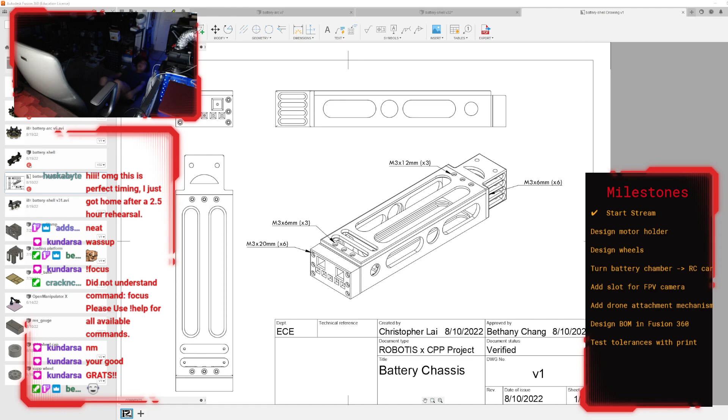Alright, here we go. 1, 2, 3, and one more just to get back up.

Redeem do 6 squats. Okay, alright, squats are the ones I'm not good at. I have fallen over multiple times because of this.

I should get some light in here. Hold on. Floor lights. Side lights. My $40 Amazon hotel lights are worth it.

Alright, there's like no space here, so I'm just gonna... Alright, here we go, 6 squats. 1, 2, 3. Oh, I'm starting to feel it already. It's 3 squats, 4, 5, 6. Alright, that wasn't too bad.

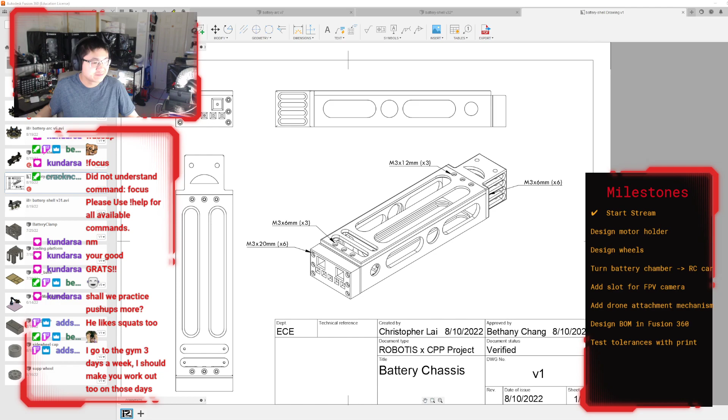I do not like squats, they make my legs feel terrible in a day. Oh, Hype Train is close. Nice. No, no, no, no, huskabyte, no.

I go to the gym 3 days a week. I should make you work out too on those days. That's what all my friends say, they want me to start working out. I politely decline. Except for Twitch.

Alright, so where were we? Yesterday. What were we doing?

I need to get a new PC, this computer sucks. Alright, like an actual PC this time.

Right, I was doing this stuff, which I haven't saved it yet. This is beginning to look a lot more like the MIT design. That's out, you haven't seen it yet. Things that rotate, it's fine.

Yeah, I pulled like 2 all-nighters doing this for Friday. Anyways.

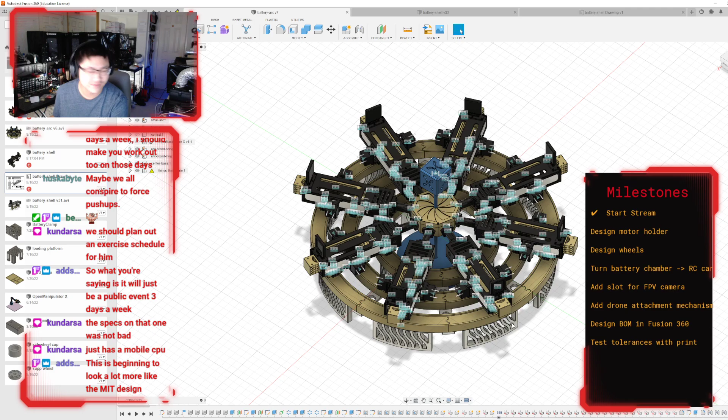That, this contains over 1,000 screws. We verified it in stream. And then what I'm doing here is I'm making it into an RC car, just because.

Wheel design and all. I still don't like this design. Save it for yesterday, I don't like it.

1,376 - it's about 1 to 1.5 kilograms of plastic. The number of screws traumatized me enough to remember the exact number.

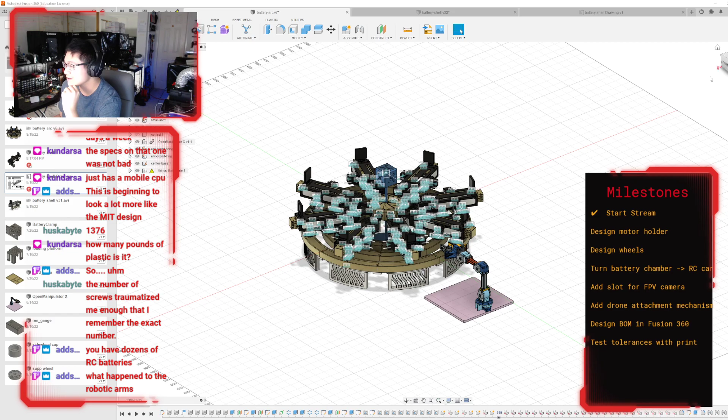You have dozens of RC batteries. No, I have 8. You want to see where the robotic arm is? Boom, there's the robotic arm. It's not even on a battery.

Let me just change that real quick. Boom, there's the robotic arm. Look at it grabbing the battery out. Look at that, look at that.

So the entire battery chamber rotates, right? Oh, it's on the other side. I didn't feel like putting it in. The robotic arm just needs to do a 180-degree turn from the drone.

You know what, I'll put it in. Where is this? Where is your thing? Oh, here it is. This is gonna lag immensely. Give it a second.

So the idea is that from the ground station to this thing, there's a 180-degree turn with a loading platform. And this is so that... oh, goodness. Okay.

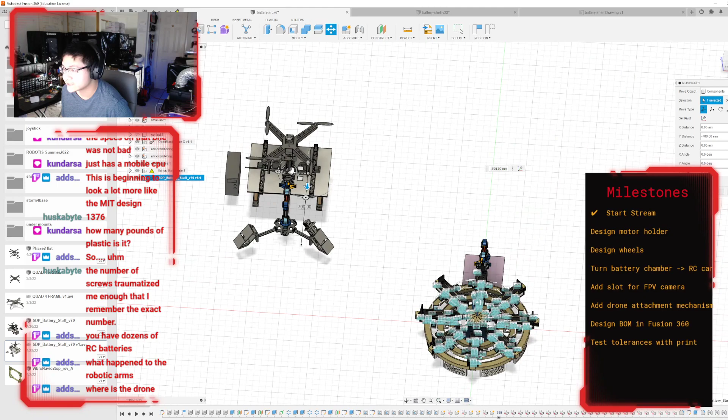So the idea is that the drone and the ground station are on one side, this thing is on the other side, and the robotic arm just does a 180. And it kind of works.

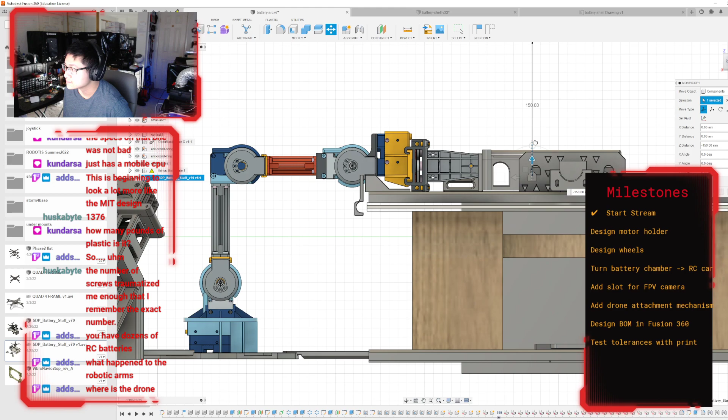So from ground station to battery chamber, 180-degree turn, so that you don't have to precision slot it in. You can just program in one command, go from point A to point B.

And then we have a planetary gearbox in the middle with the Dynamixel motors that they provided for us during the summer. At least that's the gist of it. I should explain that to you later, sandwich.

Alright, so design time. Make this like 30, 25.

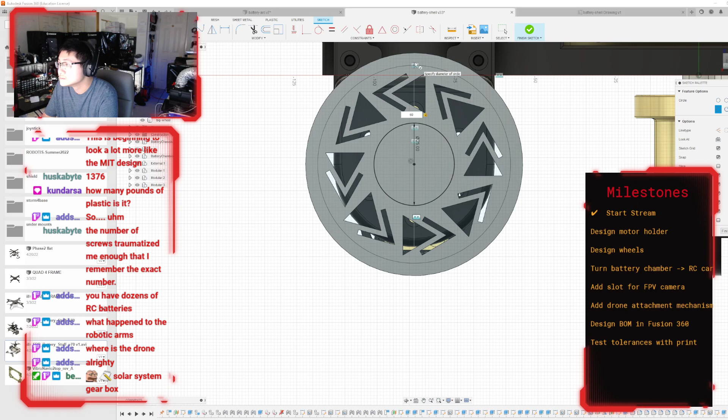The solar system gearbox, yeah. Basically, I have this really insanely heavy stepper motor that's going to be in the center of this whole thing.

And then there's going to be these two expensive motors. But this thing was like $30. These two motors were like $500. I still can't wrap my head around that. This is to give it a lot of torque. I just smacked my head with it. And these are going to help it turn.

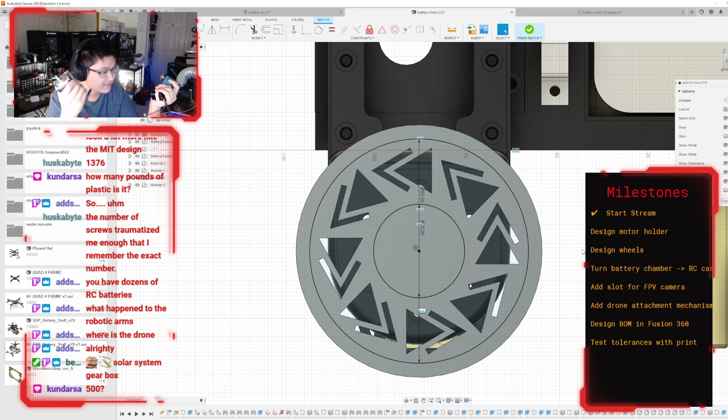500, yeah, Dynamixel motors. I haven't even considered the electronic assembly process for this. So...

More servos. Unfortunately, Robotis does not have servos. Our sponsor wants us to use the motors, and I'm going to use the motors anyways. They're just for giving us more force to work with, really.

No, because the Dynamixel motors have an insane encoding system that we can use.

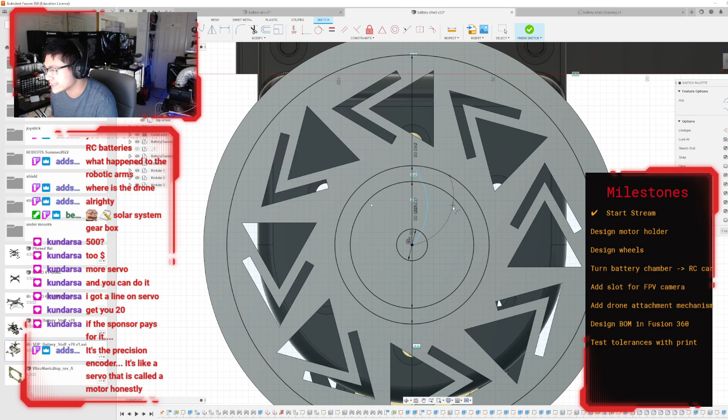How was I gonna do this? Got a line on servo, get you 20. It's supposed to pay for... Yeah, this project, I'm not paying for out of my own pocket. I mean, technically I am for the moment, but we have a sponsor that gives us stuff, so I'd very much like to use the sponsor stuff. If it were me, I would just use regular servos because I'm cheap, and I don't have the money for that.

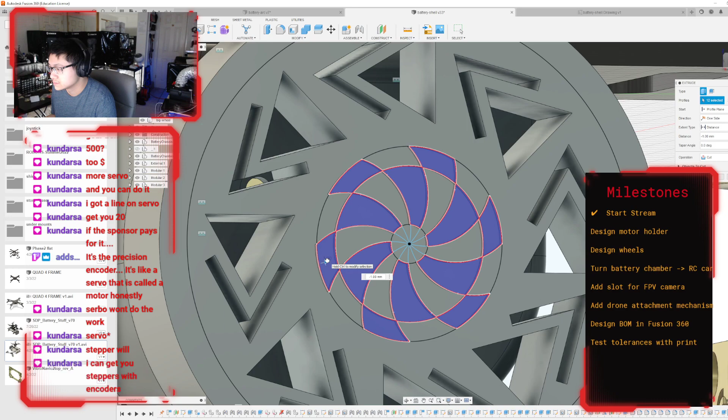That looks pretty cool. I'm going for the flashy factor with these wheels.

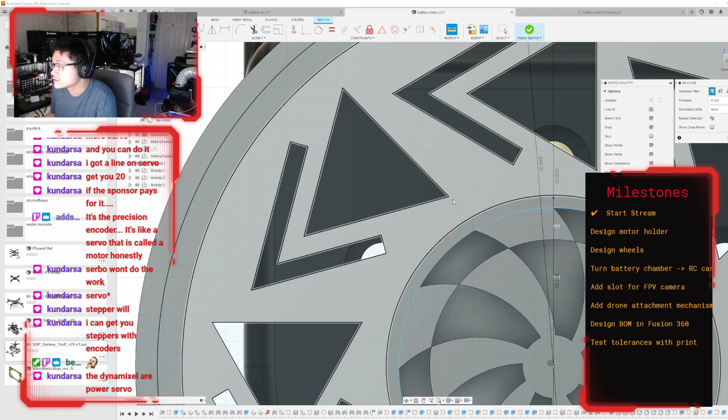Close enough. I'm gonna mark that off as aerodynamics, if they ask me why the complicated design.

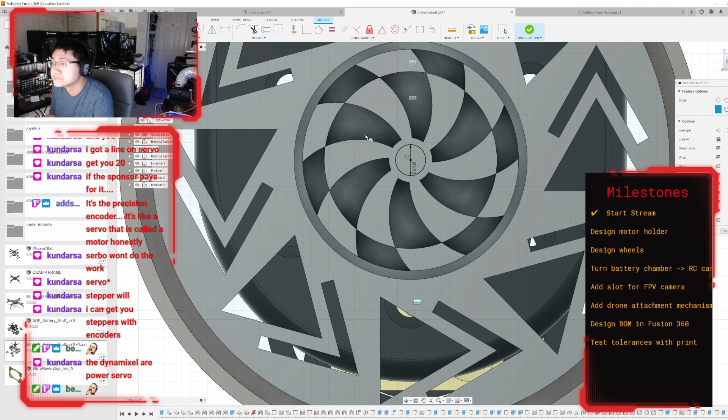Okay, do I want anything on the rim? Why is there this little piece here? I think I might make a TPU rubber wheel around this. The Dynamixel are power servos - the ones that they gave me are actually actuators.

What was he doing again? Right.

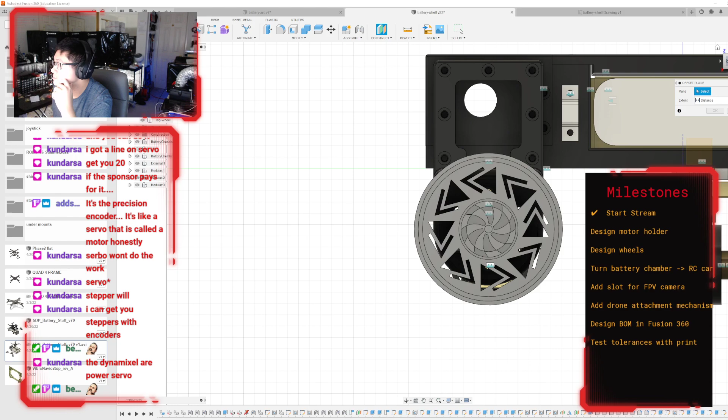No, I need a tangent plane. No, I need to make the TPU thing.

So this is going to extend outwards into the floor, but I hope it's going to provide some cushioning.

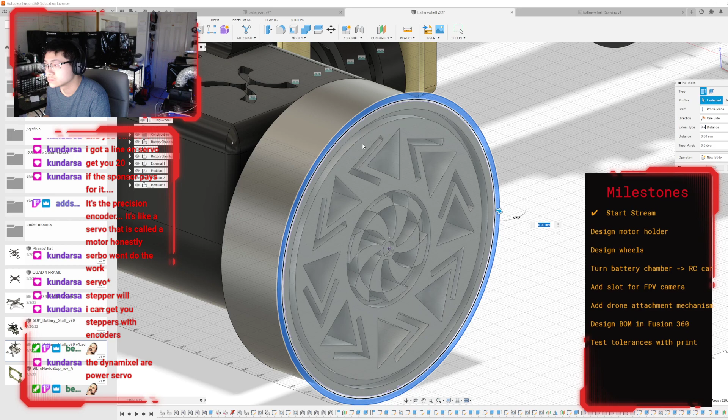Alright, so that's the TPU cover. I have no idea if the tolerances are correct or not. We'll figure that out later. Hopefully the tolerances are tight enough to hold together. And then I can go ahead and draw some fancy shapes on the side of this thing.

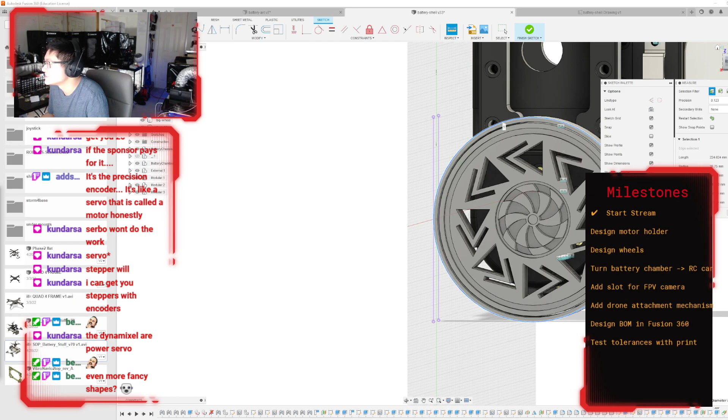So the circumference of this thing is 224.624. Even more fancy shape, indeed, yes. Can't get enough of the fancy shapes. So 224.624. Okay, I have this much room to work with.

Let's do some tangent lines. I love my tangent lines. Wait, why isn't that line...

Ooh, I have to get the Hyperloop rolling again. Maybe we'll do some Hyperloop next week.

That's a fat tangent line. Okay, that'll work.

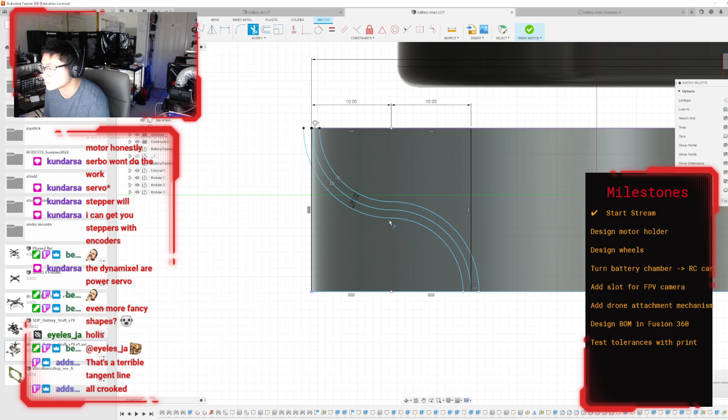Okay, let's go all the way over there. Alright, rectangular pattern.

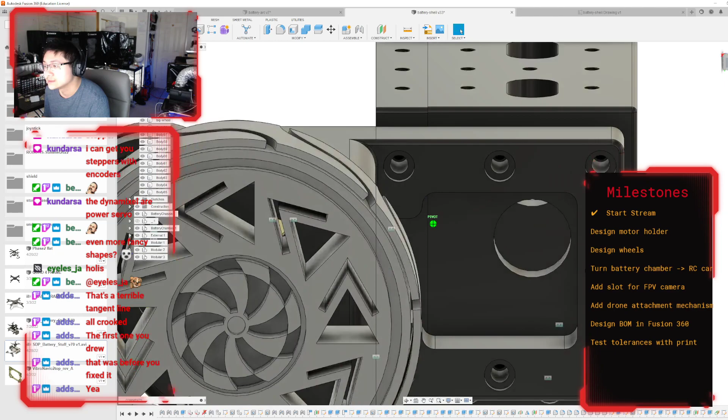That looks fine, right? Slightly questionable, actually. Oh, also it splits the... Ooh, I forgot to do something. I forgot to do an offset for this.

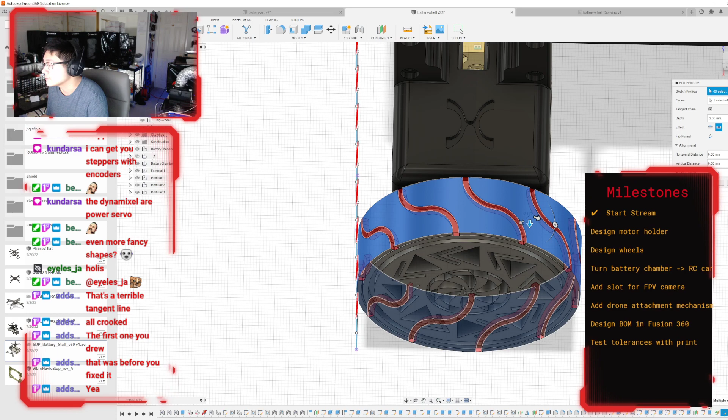So that doesn't emboss all the way. Or, no, I can just do this. I can just do this. Yeah.

Okay, that works. The first thing you drew, that was before you fixed it. Oh, okay, yeah. That's pretty good now. Alright, good enough. Okay, so...

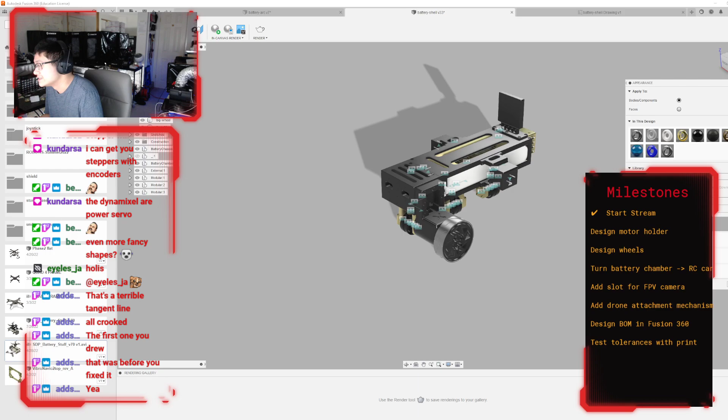Render, I'm gonna color this thing first. I'm gonna color it. Orange - there are no orange plastics. Great. Red. Yeah! Red rims.

Okay, so now to figure out how far this is from the actual motor itself, because none of what I do here actually has dimensions. Like dimensions? What are those?

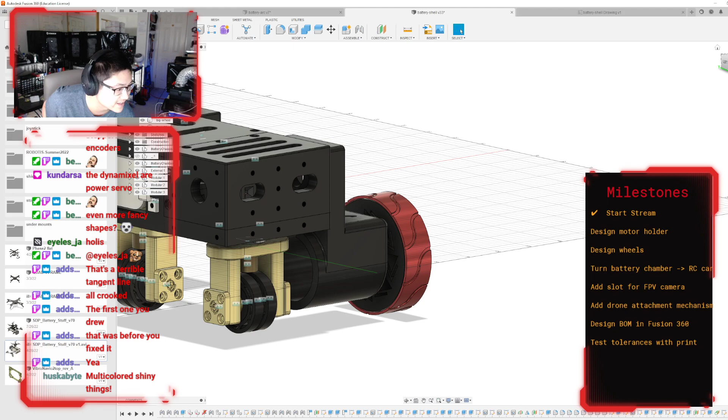Multicolored shiny things. Multicolored shiny things are very, very appealing to the eye.

Alright, how far is this actually going to be from the, where's my motor? I guess I'll need a CAD motor. Fine, I'll CAD motor. The one on the side here.

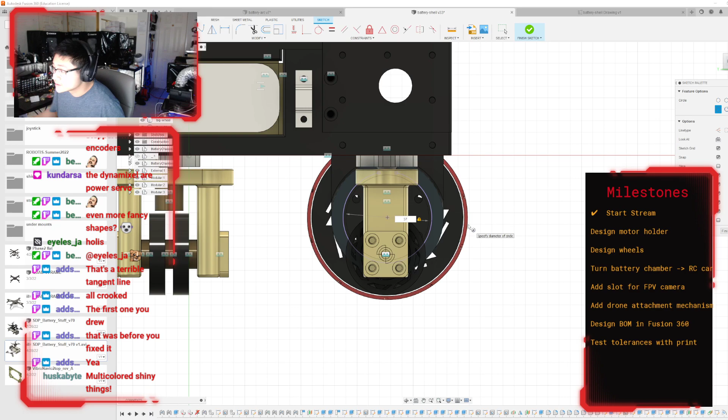So this motor is approximately 37 millimeters. Let me just hide this first. Is approximately 55 millimeters thick, maybe 56. And then on the other side, it has a little shaft.

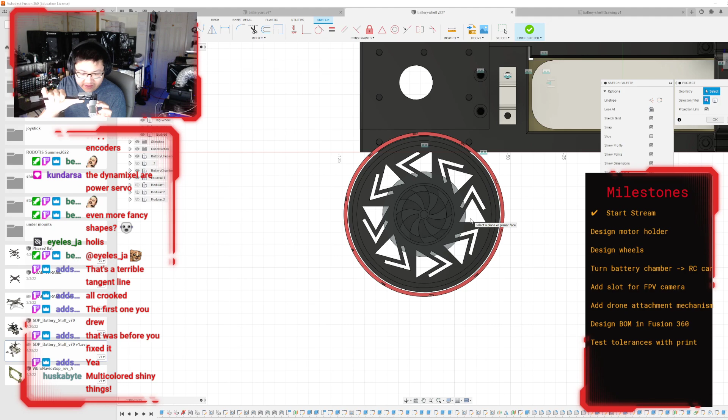Kundarsa redeemed saved my work. Oh yeah, thank you, Kundarsa. 6 millimeters. 6 millimeter shaft on the end, and then extruded to 20 millimeters.

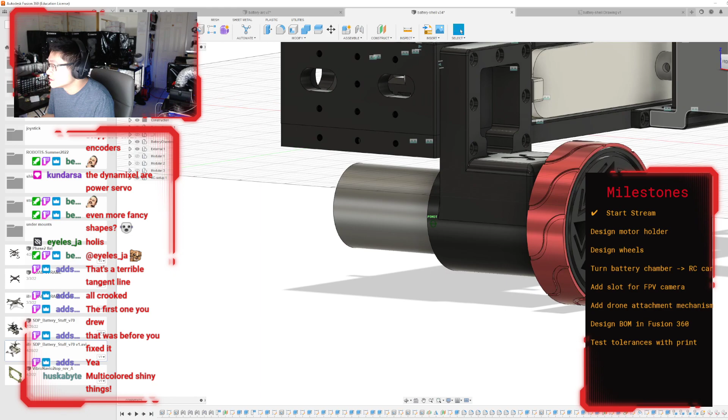So first, I'm gonna go ahead and joint this portion of it into the inside of the motor holder. Motion, I'm gonna give it a sliding motion.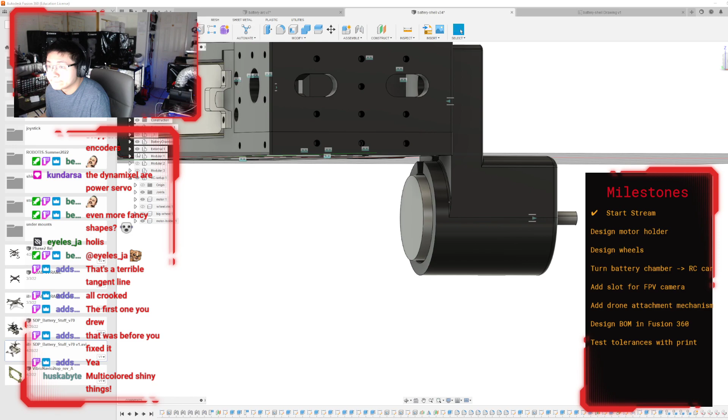Yep, okay, and then that fits, almost - actually, will that hit anything? Barely, okay. Might just screw this a little bit more then. Will that hit anything? Barely. Okay, some very tight tolerances here.

Okay, and then we get to the wheel. I'm gonna joint this thing to this thing. I'll give it a rigid joint. That was a fun shake.

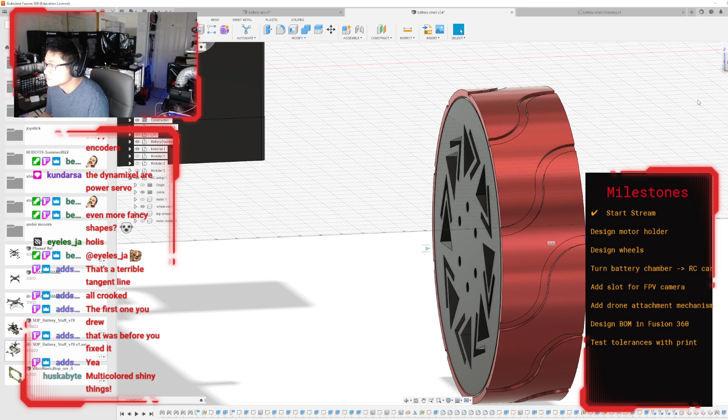Okay, and then I'm going to joint the back piece. Oh, that's a pretty long piece. Right, I realized that this thing does not have anything to hold up with because there's a metal coupler in the middle.

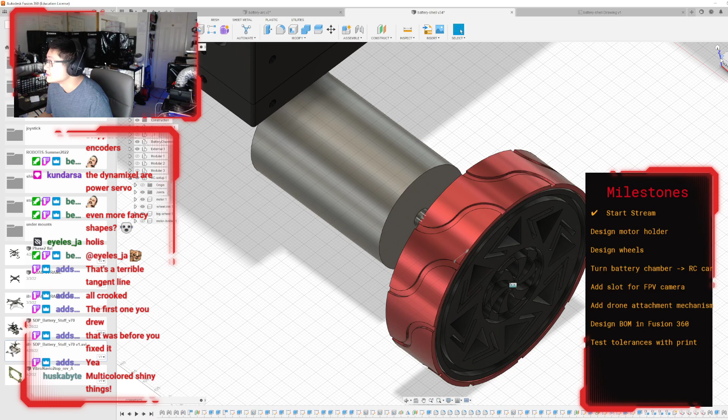Okay, I would go ahead and joint the center of this thing to the motor. They'll give me an approximate size, I think. Okay, now for the grand reveal. Oh hold on, almost forgot to joint.

Oh, stop rotating. Yeah, rigid.

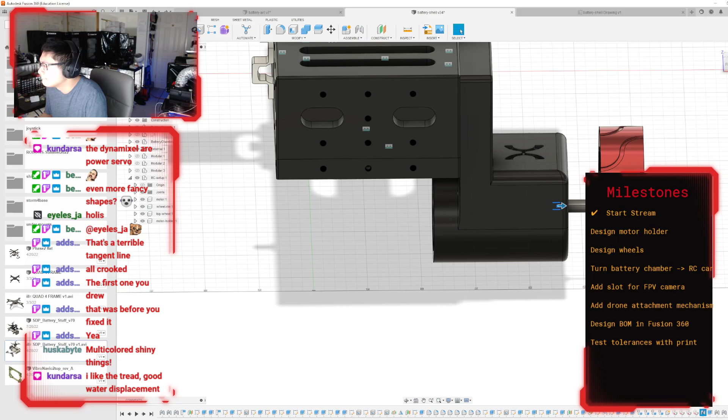Okay, this one was a bad choice. Oh come on, let me edit. There we go.

Good water displacement. Thank you, kundarsa. See, someone appreciates the tangent lines.

Alright, wheel is done, so I'm just gonna copy paste this. Okay, and then joint this piece with this piece.

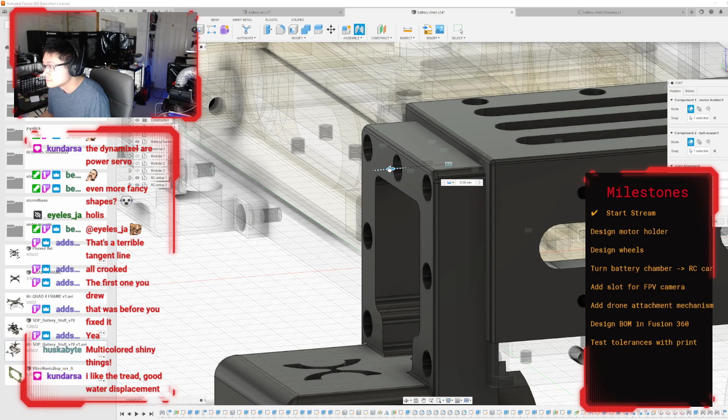Alright, and with that, we've just turned this battery into an RC car. Yeah! Yeah, look at it go.

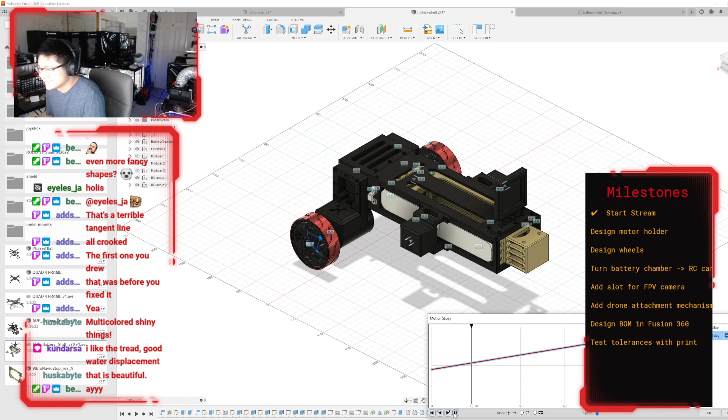Let's do a motion study on this thing, I want to see what it looks like. Look at it go. That's fun.

And I can do the same thing for this one, I think too. Now both of them are gonna turn. Oh, we can do it front and back too. Let's see it. Yeah, look at that. Wheels.

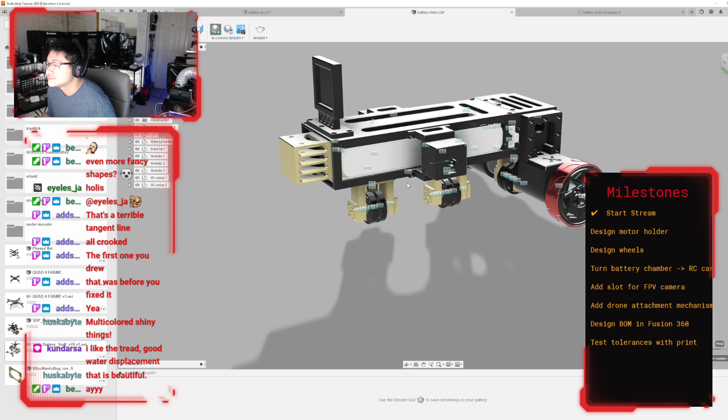Alright, this is definitely not gonna print well though. Alright, we have completed. Let's render the thing - this is what it looks like when it's rendered. Nice, shiny RC car built out of a 4S LiPo battery case. Look at that.

Alright, what's next on the list? Design motor holder, design wheels. That's so much shinier in UI, I know right? Rendering always makes things look cool.

So we did design motor holder, we did design wheels. You guys can't see the rendered design because the thing's in the way, but here we go. My stream's also gonna lag because it doesn't like rendering these things. So, turn battery chamber into RC car - we finished that, just check that off on the list.

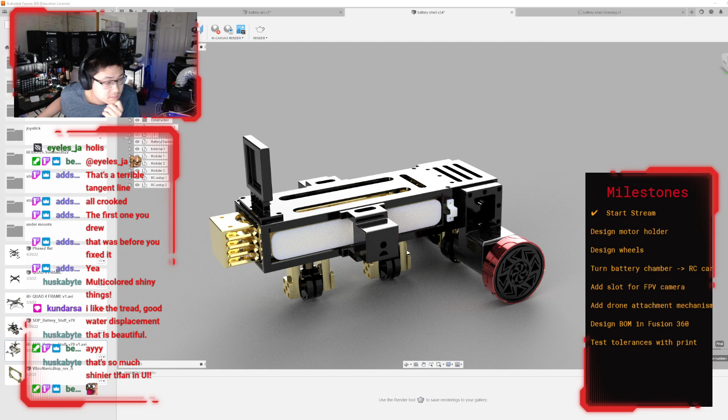Alright, we've done 4. Okay, next is slot for the FPV camera. I'm gonna take a picture and put it in my Discord.

Okay, next is adding the slot for the FPV camera. So a while ago - no, I don't want to do a generative study. A while ago I bought this little tiny FPV camera that I have no idea how to use. It looks like this - it has an antenna, a small camera on it, and I think like a back for addressing things, maybe, I don't know. I just thought it would be cool.

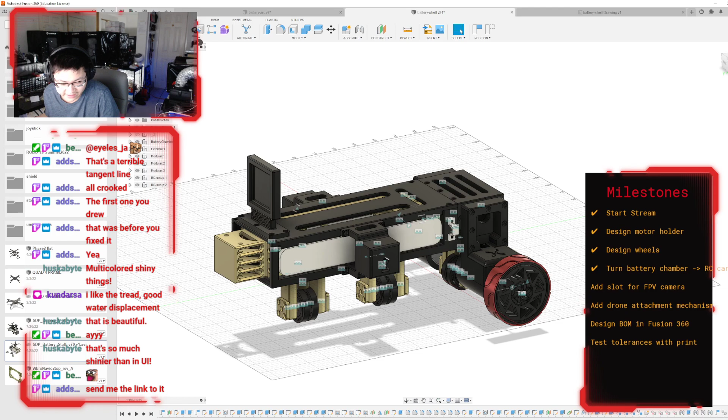Little thing, and I kind of want to use it. Apparently it's very powerful, it's kind of like the same as the iPhone camera. So, mission number 2 is figuring out how to strap this thing onto the battery and then read from it. Because theoretically, if you want to make this like an actual RC car, it would have to go somewhere on the front, and the wire goes into the PCB, and they were able to see stuff on it. Send me a link to it? Yeah, oh, that's how it's gonna know how to use this.

It's a small FPV camera that transmits signals through a radio frequency, a radio channel.

Where are you? Oh, here you go. Oh, by the way, Ed Sandwich, the fans work great. Belty had this issue where if you turned him on - that Belty over there - it would make this really high-pitched whirring noise from the PSU fan.

That was really, really annoying. So I asked Ed Sandwich to send me a recommendation for another PSU fan, and it turned out that all the good ones are sold out. So he just gave me one by default from Amazon. It worked, so Belty has been healed.

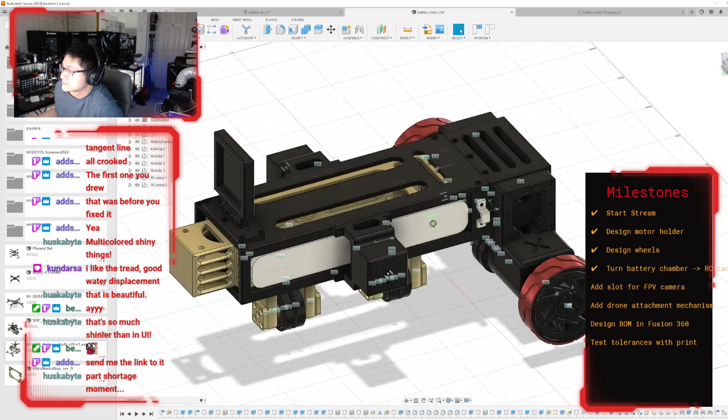Part shortage moment. I mean, you'd think it would be like a chip shortage, but also apparently it's a fan shortage as well. You know, these things can rotate as well, I think. Yeah, they can.

Okay, so I'm going to work on a mount for this. I'm going to put it somewhere up here, maybe. Now this shouldn't be too difficult. Where did I put it? Here.

It's a shipping shortage, really. Glue shortage, shipping shortage really, not even a manufacturing shortage - a supply and demand issue. Yeah, I heard that China has been having supply chokes for the longest time because A, COVID, B, China. Loklokfafa started cornering the market - I did buy a bunch of parts recently for PCB design and also the soldering kits and all from China. Now the rest of us are struggling.

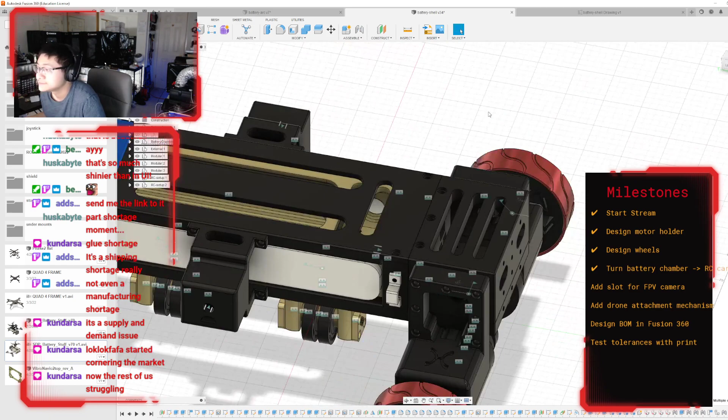Alright, so how am I gonna design a case for this? Well, the most important part is the camera itself, and also the back part where you can see which address it is currently on. I think this is 5 volts. Not sure.

Okay, let's see. The base of it should be relatively easy. By the way, this is the most chock-full PCB board I've ever witnessed in my life. Every single square inch of this PCB is filled with components.

This FPV is a VTX with an omnidirectional antenna, all in one piece. You need a VTX receiver, likely with a patch antenna. That was what I was thinking as well. I need one of those devices where it has that antenna attached to a visual monitor so you can see what's going on.

I looked into this for approximately 3 minutes, but I want to find a way to put this onto a Raspberry Pi or something like that. I think that'd be cool. It's a tiny camera.

So the base of it is going to be, let's see. Okay, the actual object is about 20 millimeters in length. I'm going to give it a generous 20.5. Here, project this.

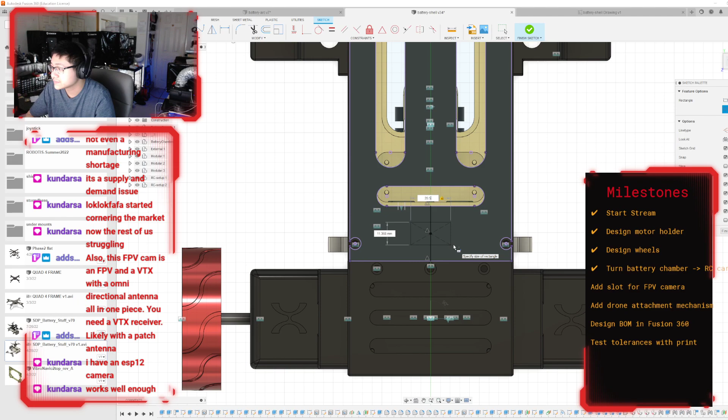Okay, so it'd be centered there, and the base is about 20.5. It's very small, actually, and the width is approximately over 10 millimeters. 10 millimeters. It's a very small camera.

I have an ESP, an ESP12 camera, it works well enough. Oh yeah, I wonder if I can put an ESP32 in this thing. I probably can. Good idea, Kundarsa, good idea.

Alright, then I'm going to make a border around it. So a 5mm border would be 25.5, right? Okay, and then by 30? No, by 20. I'm going to divide that by 2. I'm going to give it 2.5 on each side.

It's a very small design. Maybe 25.5. 2.5, yeah. Okay, and then give it a base of around 2.5.

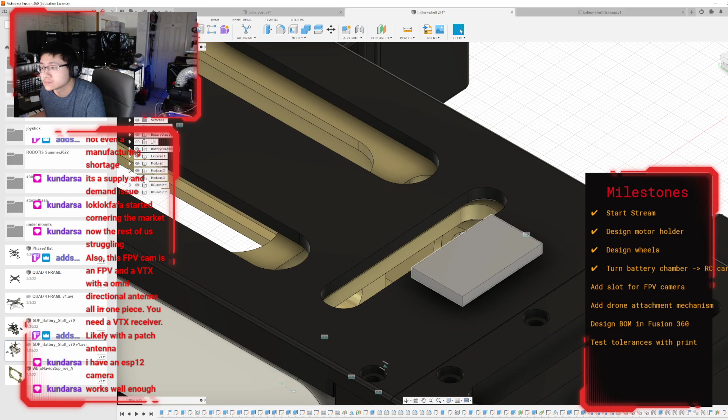Oh, there are 149 sketches. Lovely.

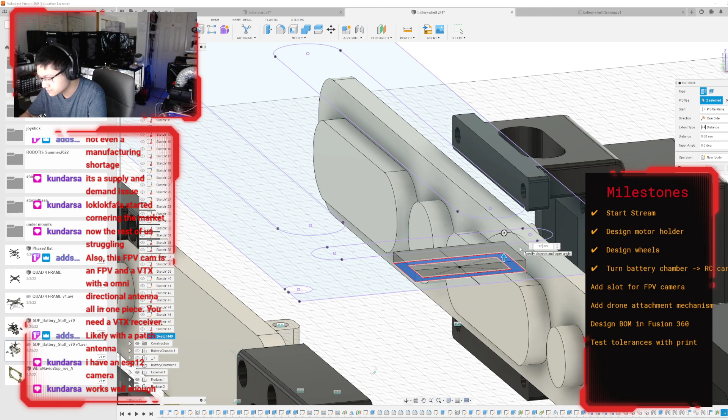Then the outer shell, the height of this thing is around... I'm going to go 15. So 15 plus 2.5 is 17.5. Okay.

All right, now we make some cuts in the middle for the cameras and stuff. So if this entire thing can fit inside this little box here, the sides don't need to be touched. The center does need to be touched.

Should go almost all the way down. So let's see what I need, what parts I need to cut out from the back. The first thing is the center camera. The central camera is about 9mm.

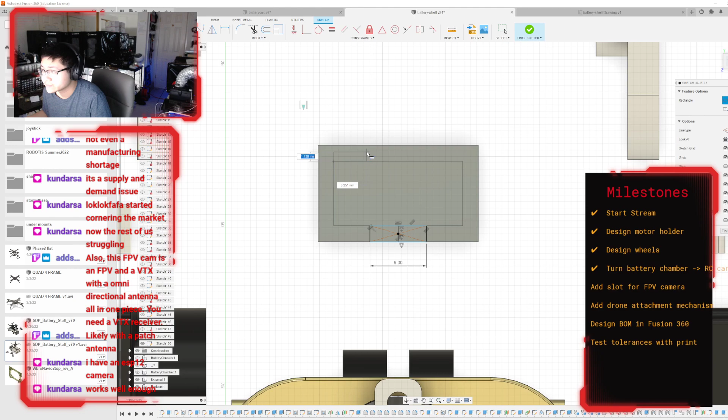Okay, so that'll be for the camera, and then from the back there's an LED looking thing on the back here. This thing is about 7.5mm. And then on the right side there's a wire sticking out of the top, so that is going to be five millimeters.

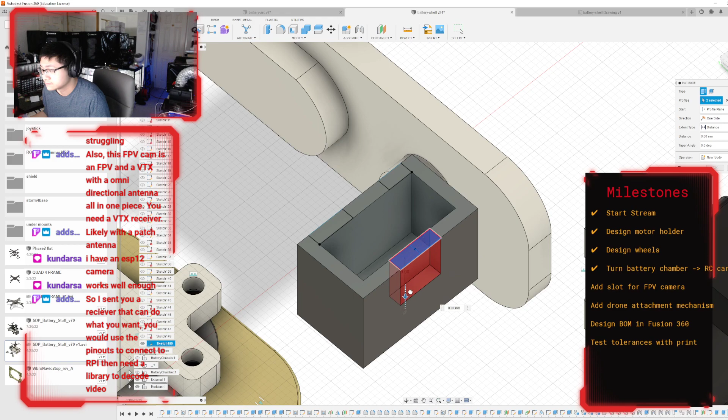Okay, from this to the bottom it's 11.5. Negative 11.5. Oh, same for the other one, I believe. That one's 10. Negative 10. And then this one is negative 7.5. Why are these all three different?

Okay, so I should be able to just slot the FPV camera inside this. And then maybe I can have something, another part, another small part screw onto it.

So I sent you a receiver that can do what you want. You can use the pinouts to connect to the RPi and then a library to decode the video. The encoding for your video transmission is NTSC. Oh, that's useful, thank you.

Let's see this. SkyDroid 5.8G dual receiver. Wow, cool. Awesome, thank you. But I'll still research more for one where you can lock in the channel, because it switches to the strongest signal. Ah, yes, that exists. Okay.

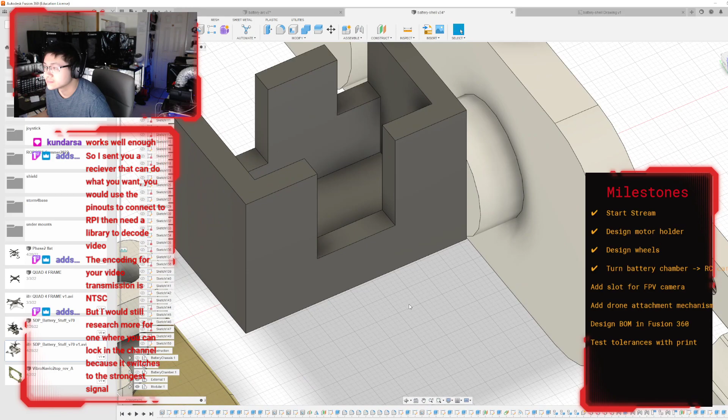Alright, so it needs a top piece to act as a cap for it. I'm going to go ahead and put some fillets on this entire thing, just to make it look pretty.

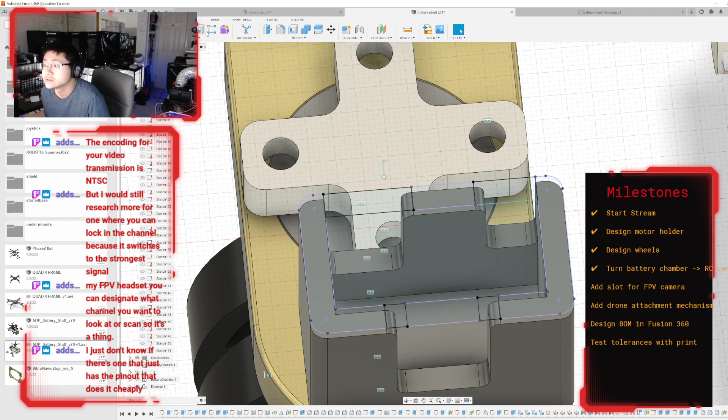Oh, I have to make sure I don't block the back part of it, I think. So that would be this part. Actually, it should be fine. It should be fine.

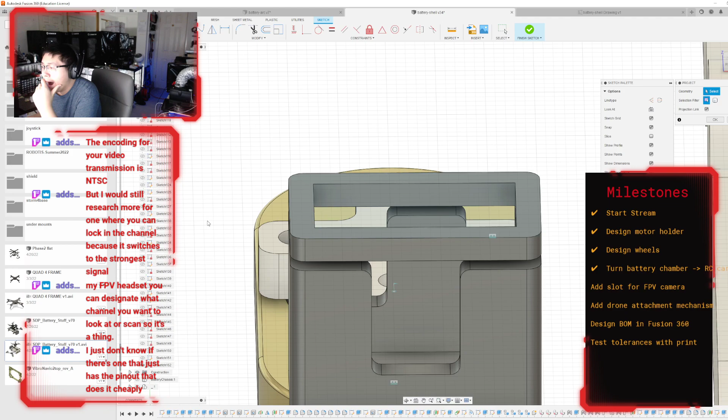Okay, and now I make some holes. This model is lagging my computer so hard right now. I just don't know if there's one that just has the pinout that does it cheaply. Drink some water, I don't know.

Okay, I think these holes are good. I mean, it auto-created them for me, so who am I to disagree? I do need one more here, though.

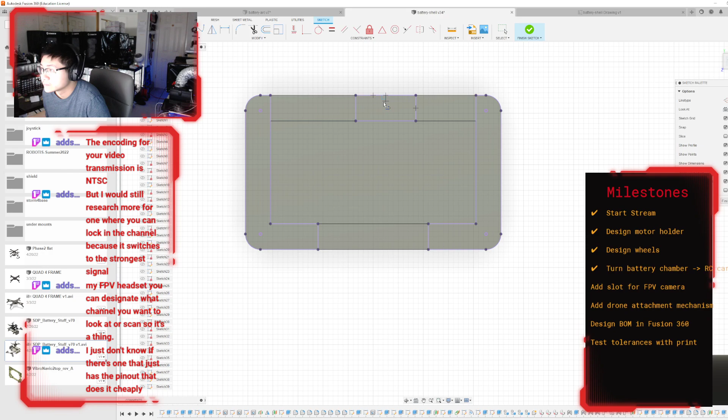Okay, I think these holes can be, they don't have to be M3s, because M2.5s are so large already. I think they have to be M2s. Yeah, they have to be M2s. Scrolling back down to the sketch.

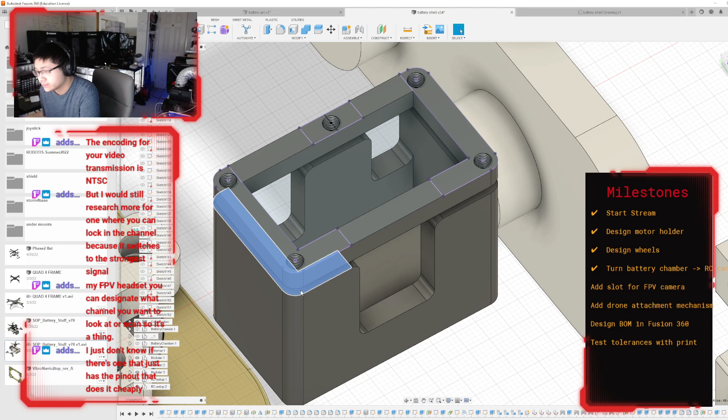So it'll be M2 by 5. M2 by 5 it is. Okay, that part will go on that part. The back will be open. Alright, that's basically it, very easy camera module. Now I just have to apply some screws on the bottom to attach this piece to the battery chamber, and then we'll all be good.

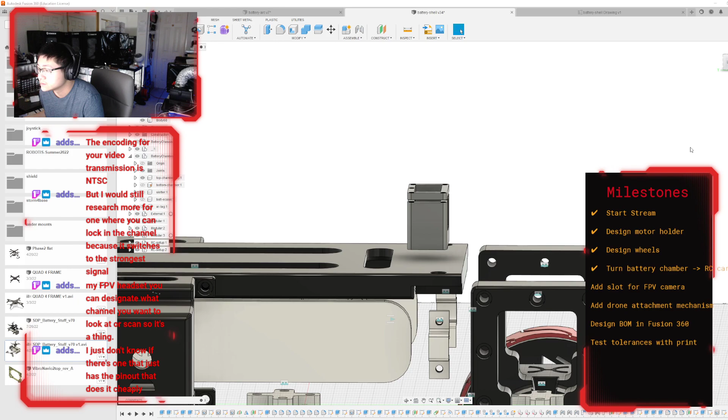So this will most likely be screwed onto the battery chamber from the bottom. So under the battery chamber, bottom, I'm gonna hide everything else. So on the bottom piece here, hey huskabyte, we're about to get some more screws. There's 5 more screws times 8, which is 40 more screws, plus the bottom piece, so let's see how many screws I want here. Slowly getting closer to the goal, 2,000 screws.

Just an FYI, the VTX modules get hot as heck. It might melt PLA if used for more than 15 minutes. Noted. Noted.

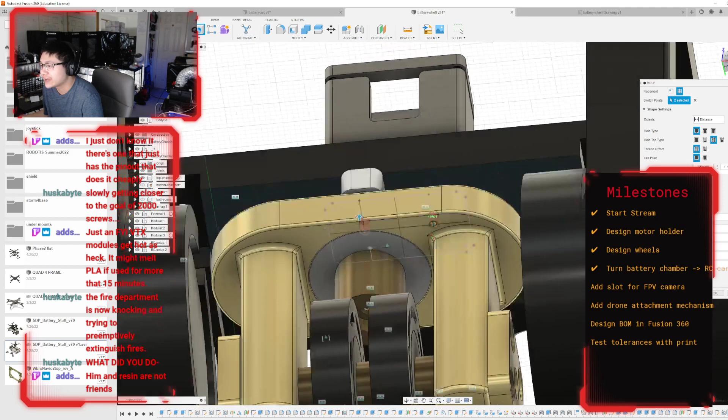These can be M3s. Oh, this is going to be a fat M3. Okay, 6 to 3.5. And then I don't know how deep this is, I'm just going to guess. 10... oh that's close, 8. 8, 9. That's close, it's 8.5, yeah, it's 8.5.

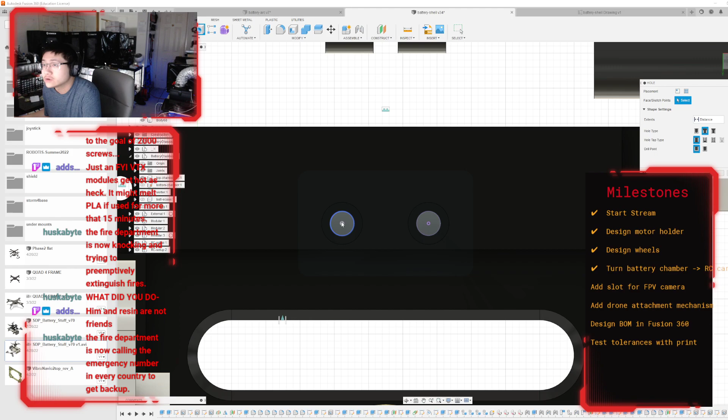Okay, from the bottom. Hole, hole here, tap, simple. Okay, let's do some math. So if it's 8.5 all the way through, and it's 2 millimeters deep, so that's 6.5, that means I need an M3 by 8 - no, 3 by 10, so this will go 2.5 deep, but the bottom floor is not 2.5 deep, it's only 2. It's like 2. Therefore, M3, 1.5.

This FPV camera is gonna fly off into the distance. I can already see it. Alright, good.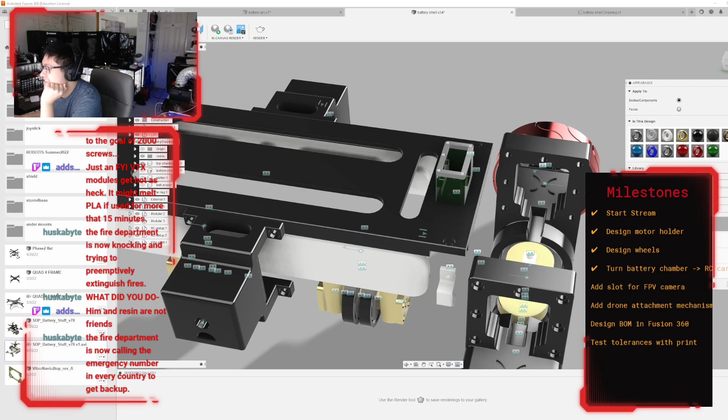Okay, we're in business. Let's color this thing, what color do I want this to be? Let's see, I already have red, I already have silver, I already have white. Is there a green? There is a green. I can have this be a glassy green, or a clear green like that.

Alright, look at that, we're already done with another one. FPV camera slot done. I'm gonna look so cool pulling up to school next week. Pink, alright Bellum, I'll make the next one pink, I saw that a little bit too late. Alright, I can check mark the add slot for FPV camera now.

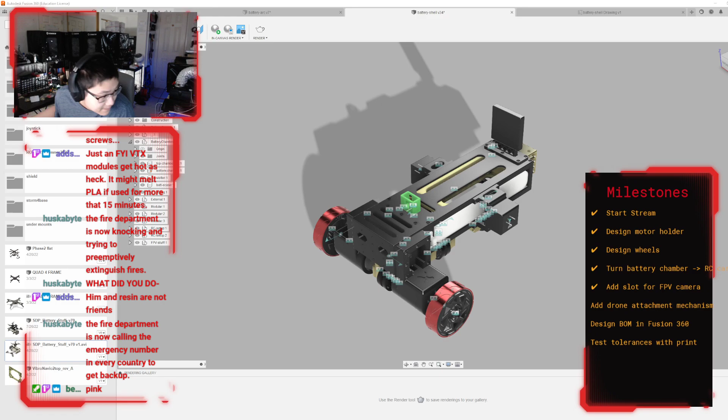Next is the drone attachment mechanism, which I'm going to do later. I'm going to render this to show you what it looks like when it's rendered. And sandwich - if it gets hot enough to melt PLA, it's like over 160 degrees Celsius. Shiny.

Thank you for joining me on another episode of Questionable Engineering. Now let's see what it looks like if I actually place this model inside the actual battery arc, and then I'll end the stream here for today. So the battery arc, I have to go ahead and get the latest version.

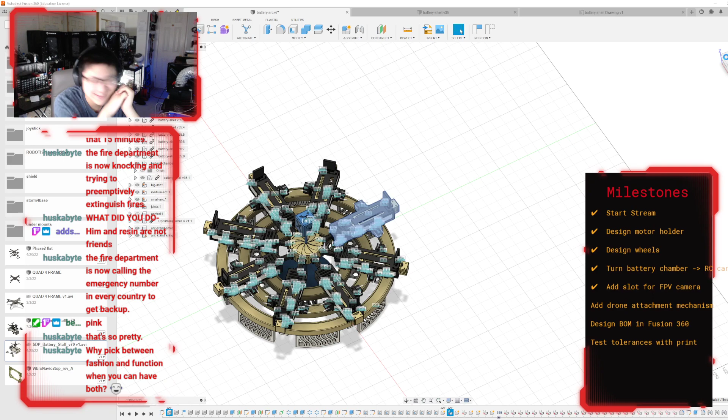Oh, I can foresee collisions. I can foresee many collisions. Oh, it's calculating, it's calculating. Why pick between fashion and function when you can have both? Exactly, it's calculating. Please don't crash - every time it tries to calculate something, Fusion crashes. I'm gonna need a new PC just so that doesn't crash.

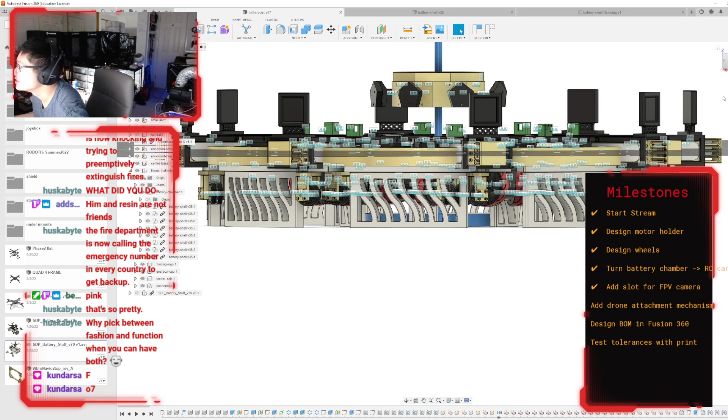Oh? Uh-oh. Oh no, wait. Oh no, what's going on? There are wheels everywhere. Okay. Yeah, I don't think it liked that. I do not think it liked that. Can I undo that change?

Okay, this will be forever stuck in V32. No one touch this. Choose version. Yes, version 32 is stable. Oh my goodness.